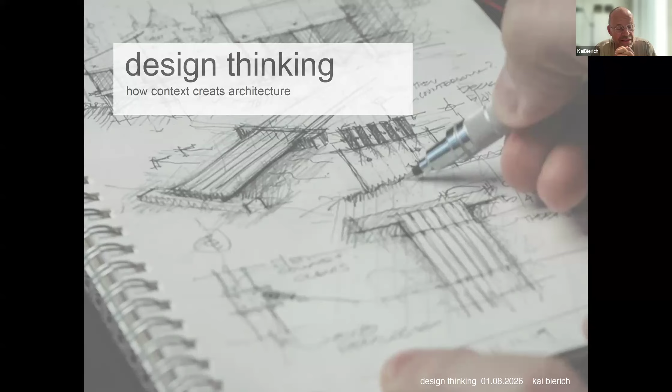A few sentences about design. Design is an art of giving ideas meaningful form. It connects culture, nature, and human experience to create places that inspire. The best design feels inevitable, as if it has always belonged there.

And therefore, I will show you the first picture. I think everybody knows this from Michael Graves. It is a teapot, and it is something which is very important for design.

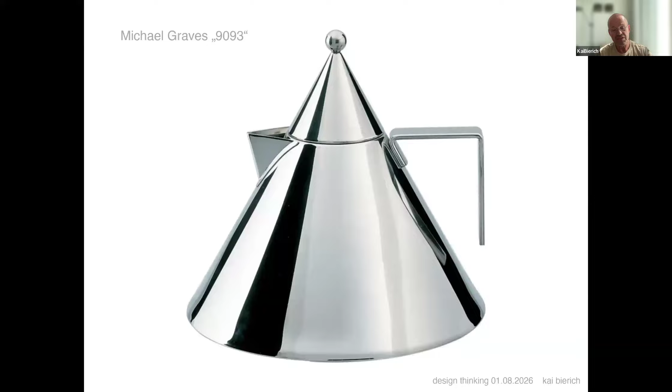Design combines, to me, four elements: always functionality, practicality, attractiveness, and also affordability. So to us architects and designers, it's very important to achieve this balance. It's not always easy, and it's important to have a very precise view on what is necessary for the specific design.

And so I will give you six projects in the next 30 minutes, to read with me together the different importances about landscape, about history, sometimes about culture, climate, movements - meaning the external movements from traffic, about also the internal movements like in a museum, about light, which is very important even here in Germany, where the light is not as strong as in Vietnam, and of course about the human being, the people.

And so I will start with the first project, the Fair Trade Center in Stuttgart, which was partly one of the biggest projects in Germany.

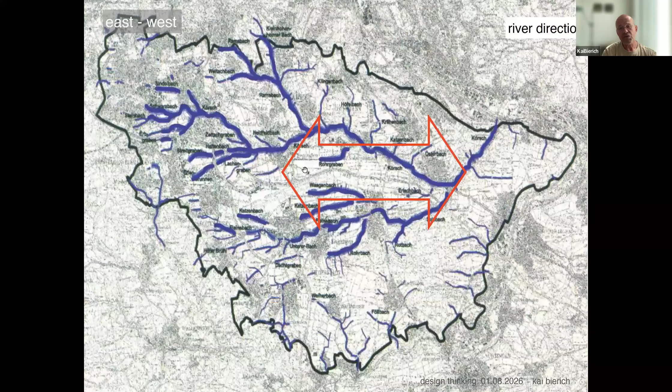This project is deeply rooted in the character of its landscape. Before, there were fields, like you see also around it, fields. And also the topology was very important, because on the one hand there were rivers slightly going from the east to the west. That was one thing right here. And that brought us to the orientation in this direction. So all the other participants of the competition - an international competition with 150 offices actually - were going along the motorway here. And we said, okay, it is more useful to have this orientation regarding the nature, the rivers, everything. But we had the problem that then here the motorway blocked actually the design.

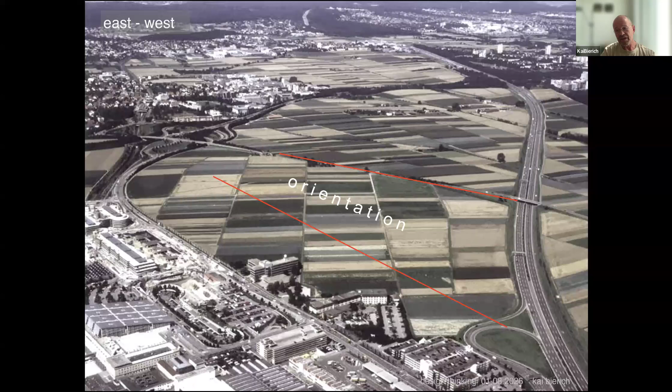So it was a question of ignoring the guidelines a little bit. The guidelines stopped here, and we said okay, now we want to go over it and orientate the whole design on this stairs. This is about 20 meters, which is quite unusual for a fair trade center. Usually fair trades, like other international ones such as Milan, are always flat and you don't go up and down. But here we are in Baden-Württemberg near Stuttgart, so it was very important to regard the topology.

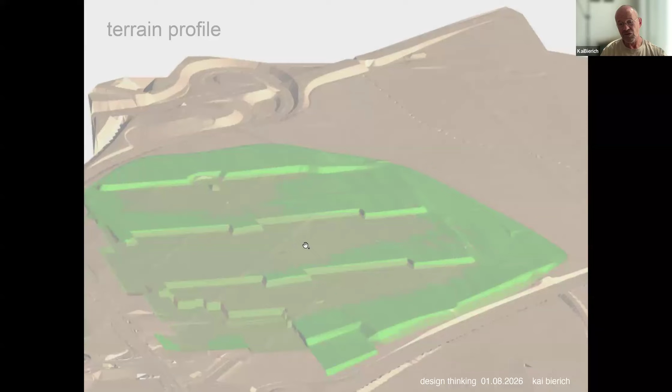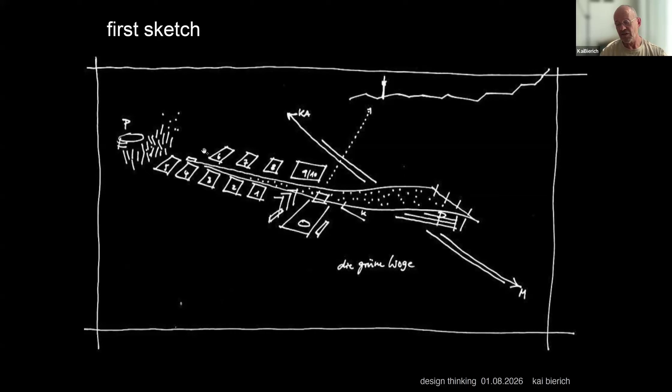That brought us to the first sketch, which I did here. It was going over the highway with this huge wave. We wanted to create something like a park, a green connection between east and west over the highway. The orientation of all the fair trade halls and the Congress Center, and the two entrances in the west and east, gave us the structure for this.

Now you see what we wanted to make, the parallel situation from here, east-west going to the airport. It has two connecting spaces here, two connecting possibilities. That actually brought the jury, in the very end, to the opinion that we got the first prize, right? And it was not so easy.

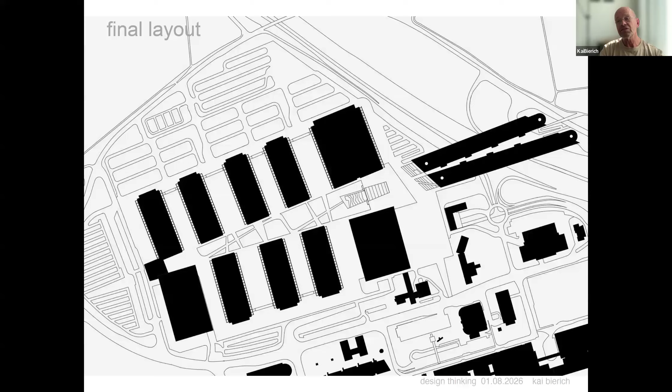It was 150 entries. The second round was 30. And the third round were 3 offices. In the very end, we were super lucky that we got this, because it was, of course, for the office totally a movement in another direction.

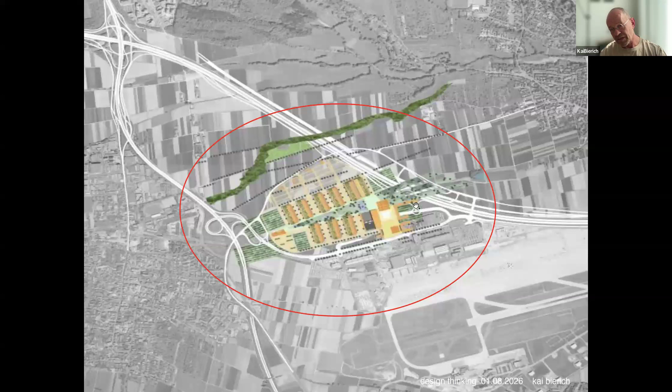So here you see still 3 fingers going to the highway. That is what I told before - it's also a question of affordability. That was too expensive with 3 fingers, so we put together all the parking lots here in 2 fingers, and reduced the angle a little bit, what you see here in the very end.

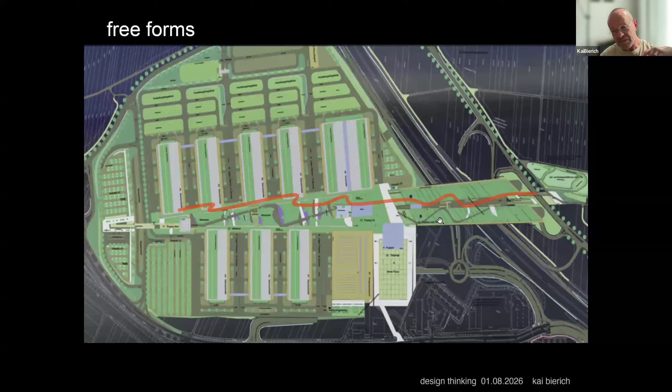Then, because that was actually a landscape design, also very important - the population of this area was upset about the whole building, and we said okay, we are doing a lot in the design to give back some natural elements. So we said, okay, this is a rational structure with the halls, everything, but we disturb it, like yin and yang, or like wabi-sabi. We disturb this with organic lines.

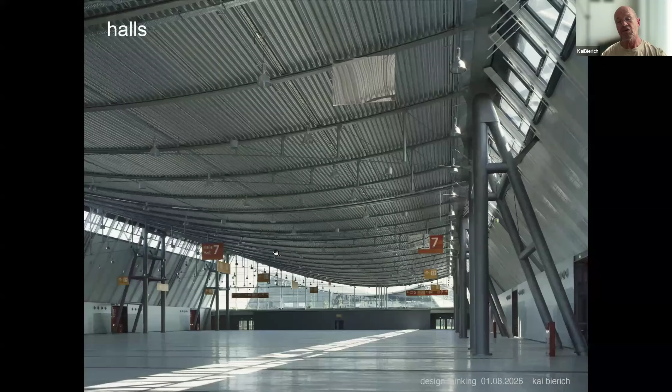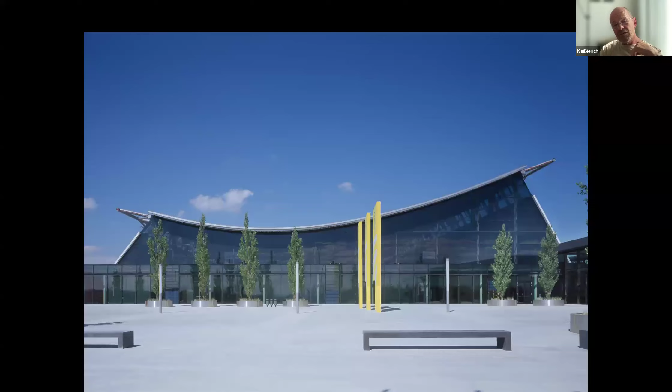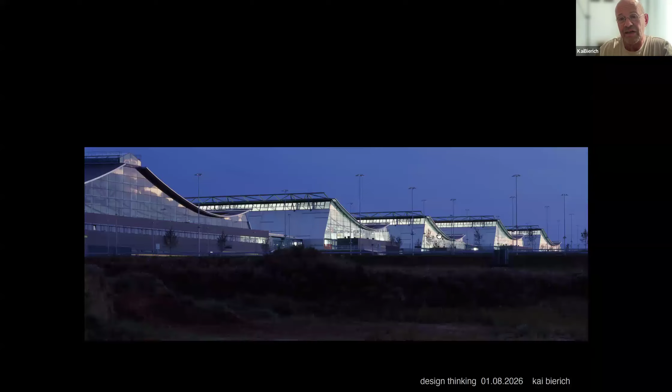This organic line was also documented in the shape of the roofs. You know bridges, or something like a rope, which has a very natural shape. We transferred this into the design of the roofs of the fair trade halls. Here it was in steel, which gave a very nice and iconic view to the outside, and it's also unique to make this totally transparent, which was new for fair trade centers, because we said people should also have normal daylight in the halls. Here you see, to me, actually a poetic or lyrical side of the fair trade center, which is not usual - usually you have more black boxes.

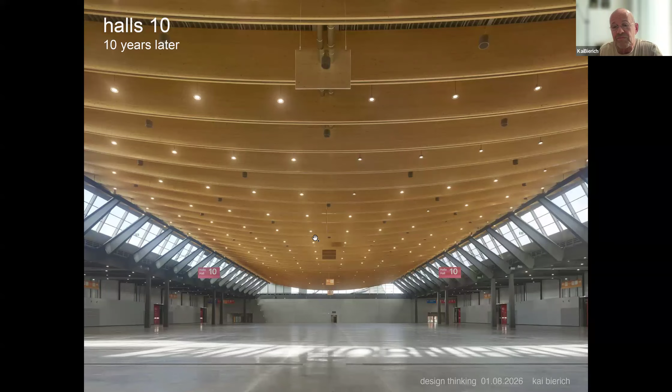A few years later we had the assignment to do hall number 10, because this fair trade center had exploded and was in high demand. We said, okay, what do we do? We did not want to just continue with this existing steel structure in the design. We said we must follow the form somehow, but we wanted a sustainable development in the materiality, so we used wood, which is now very requested in the calendar of the fair trade.

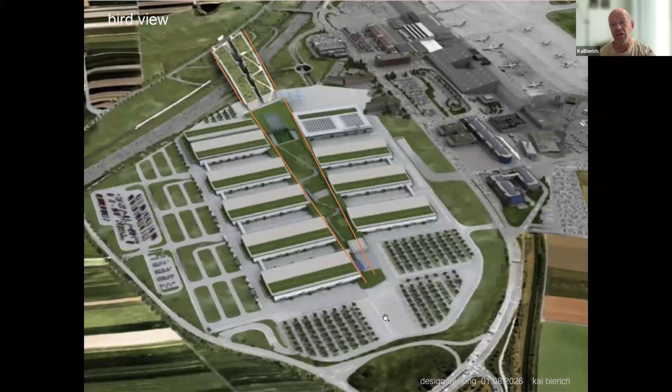So the other element was this park. Here it's very busy, the halls are super busy during the fair trade. So we wanted to have people going out here to discuss, to smoke, to have drinks, whatever - like a relaxing zone, which we followed here in the parking lot over this motorway. And you see here what could happen here.

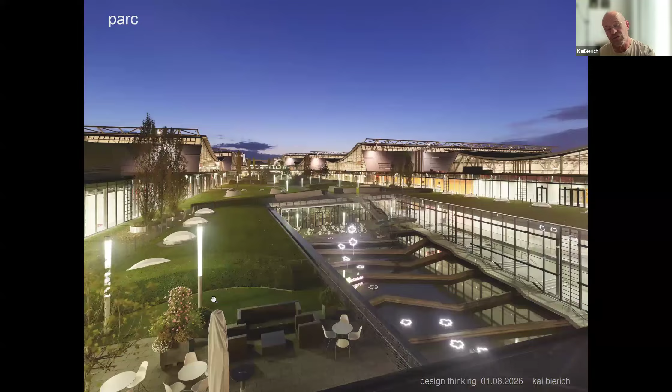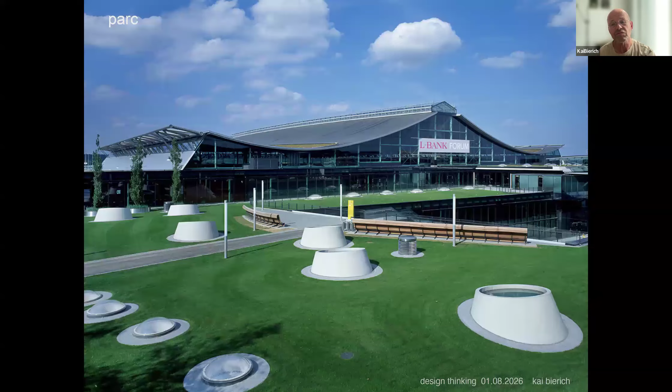We had daylight systems, which I'll show you later, and some sculptural elements for the daylight too. You see here different fair trade setups, and here is somehow calm - here's water and good, pause-like quality. Now here you see this in detail, and also the organic forms I mentioned - here we also followed this principle in the park.

Now I'll come a little bit to the materiality.

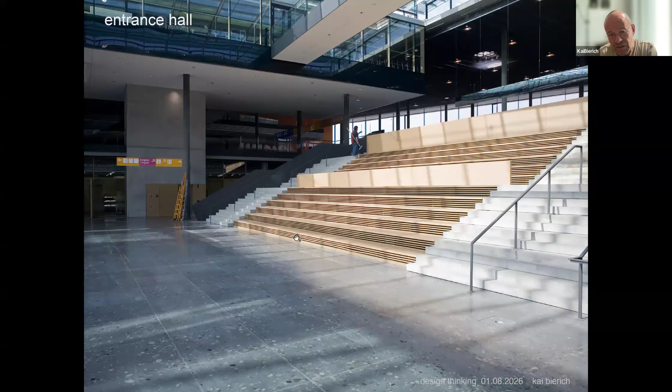That was some other thought to give only a background, like in a theater, with very rough, authentic materials like concrete, wood, glass, white slabs, and so on. To have something like a background for this really colored things going on in the fair trade usually. The only thing we allowed the designer here, done by the office Uebele together with us, was this orientation system. So whenever you see color in this fair trade, it is orientation, not architecture. Architecture is always in the background, like wood, like slabs, like authentic natural materials. There's no lipstick, no decoration. This is only rough, a background for this huge event and the color things coming up in a fair trade.

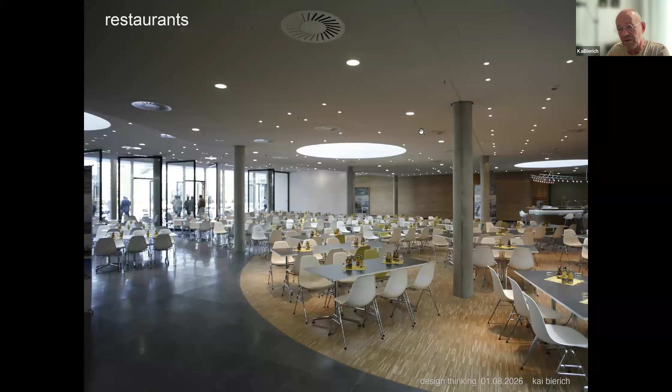The other thing is the transparency and the skylight, both very important to have natural light in the fair trade, and color. If you do skylights from above, they are 5 times stronger than lateral light. So if you have a window of the same size to the side versus above, the skylight is 5 times stronger. So we said, why don't we do some perforation to the sky, going deep inside, to give this natural atmosphere. It's totally different with natural light compared to only electrical or LED lights.

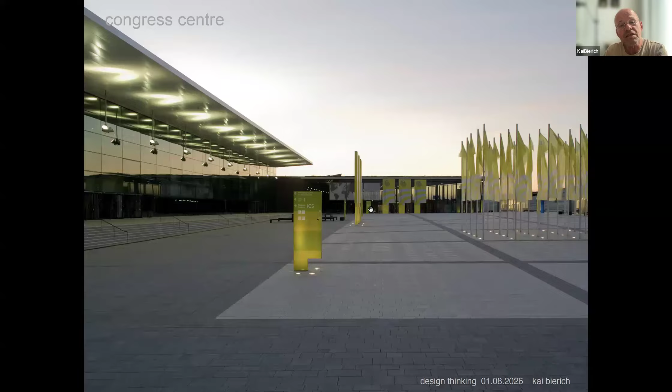The other thing was the Congress Center. We also wanted to have the roof in a curved, organic way, but not readable as a different form from the Fair Trade Center. This roof comes up 12 meters here, and statically it's really sportive. We did this because we wanted the central plaza to come into the building, so this transition is accompanied by the roof.

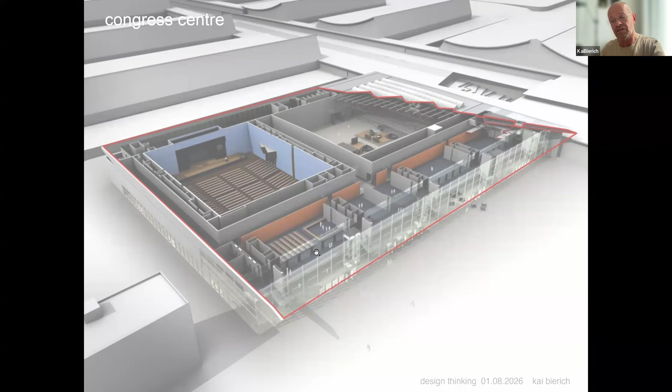What is the content here? We have 2 big halls for 3,000 and 2,000 people. We placed the seminar rooms back behind the facade, about 6 meters, but we also put a skylight over it to always have a lightened atmosphere for the working spaces.

The last thing is the parking lot here for 4,200 cars, following the park onto the roofs. People go through the middle and directly to the main entrance of the Fair Trade Center. It's quite easy, but it did not follow the guidelines, it actually ignored them. I told you the plot was already finished, but they said this is such a tremendous idea that we got special treatment from the government to build this overwhelming structure over the motorway.

They needed money, so they rented it out to Bosch company, which gave about 15 million euros for 10 years. Because it was quite expensive, more than usual, it became the biggest advertising sign after the Hollywood letters in the USA, which are 15 meters tall, ours is 12 meters. It's just a fun story, but you also see at nighttime it becomes something like an iconic symbol for Stuttgart. If you come from Munich to Stuttgart, you always see this parking lot at the very beginning, and that makes this building famous.

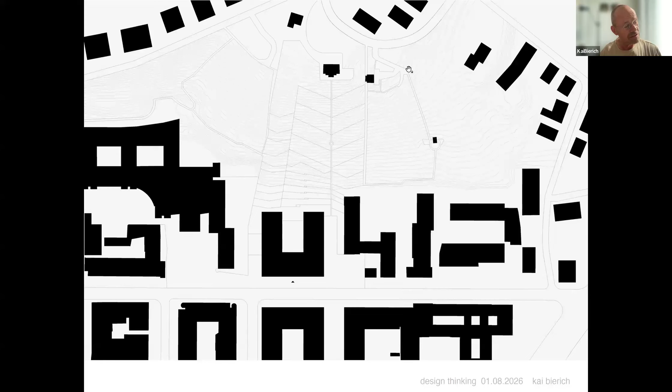And yeah, here you see actually this is a road. This is a city here, and they go up and climb like the first step to the vineyard, go to the vineyard and use this vineyard, other employees here, right?

And this is a U shape. So here we needed actually a huge covered space, so we did these top lights, the skylights, which belong to the grammar of Wulf Architects, so that we have natural light in the interior somehow.

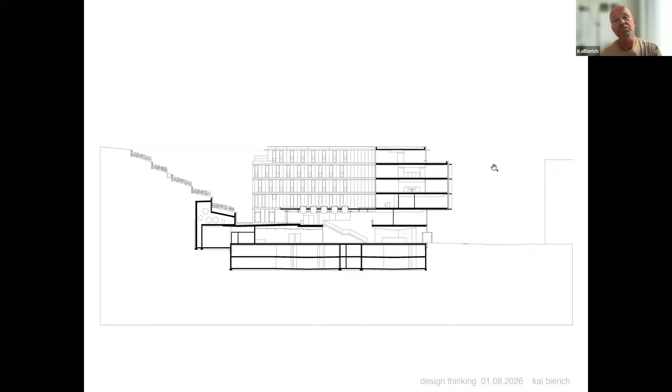Yeah, this is the vineyard you see. There's still existing grapes here, and even a little house which belongs to this project.

And now you see what I told you, this U shape and direction here, very open, a very different facade which we have seen on the beginning, right? This was the facade in the beginning you see here. It's totally different from the facade which we have here, because this is like an egg - one side hard and inside it is soft.

And you go out here and then climb the vineyards. And the inside here, you see the skylight again, and also the authentic materials - only what you see is wood, not lipstick, nothing colored.

And this one is totally open, you can move beside, and then you have this huge space, and you can integrate the entrance hall into a huge public space.

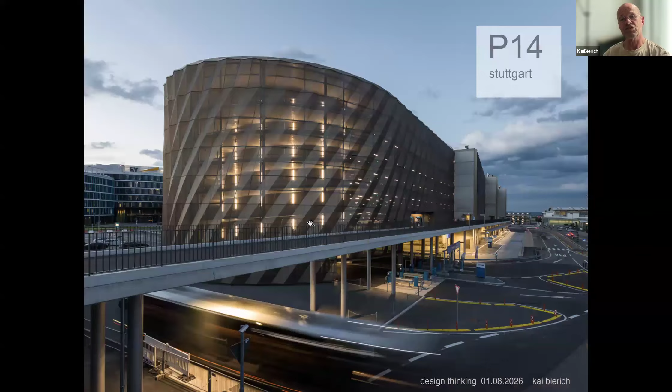Then there was another thing near the Trade Fair Center, which was a parking lot. Not such a super task for an architect, but we said it was more than just a place to park cars. The ambition was to create an iconic gateway building that strengthens the identity of Stuttgart Airport while fulfilling several urban functions with a single architectural volume.

In the basement there were buses for going around the region, and upstairs there were 6 stories for cars. We told the airport, why don't you do this pedestrian bridge here and connect to the airport? That gave a huge impact on the renting of this building, because it's favored by people - they just get out of the car and go directly to the airport.

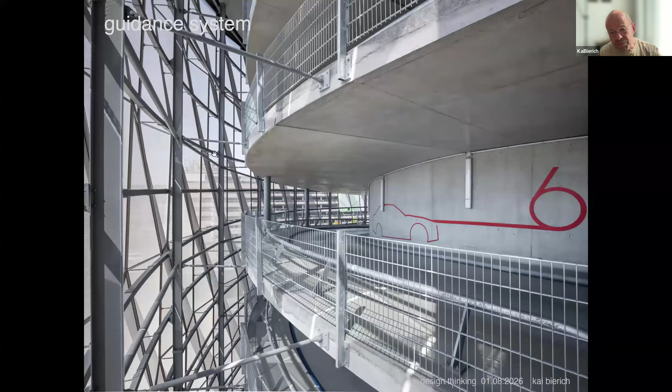This is the one at the airport, with a folded metal facade which, if you look at it in this crooked way, is nearly closed. But if you go from inside to outside, totally different - it's more like a transparent skin a little bit, and you see the things around, but through the skin.

So this is outside, this is inside. This is to have the natural light, of course. We didn't want to close the facade, because then you would have needed LED and lighting things and so on. We placed this facade on this one.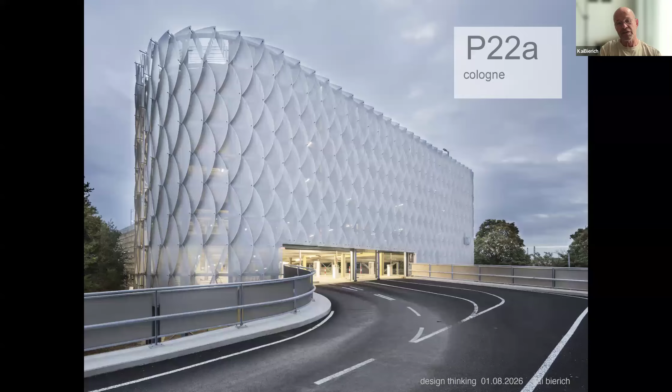It's very similar to a building we did in Cologne - it's like a fish, a little bit like the skin of a fish, the same principle as before, not folded but added one by one. We did the same thing, getting the light in, and from inside to outside you could read through. It was a very iconic building also at the Cologne airport, near the Cologne airport. Same principle, but totally different in detail.

But that is something to use in design - if you find a principle, there's no need to do it the same way every time. Think, why could I not use, from my whole history, from all my life experience, in a different way - no problem.

Now we go to China, internationally. There was Chongqing - nobody knows it, but everybody should, because it's the biggest city in the world, about 35 million people. It's really big. A lot of international architects worked there, like Moshe Safdie - some of you might know this building which has connections here. It's really like utopia, something like the 22nd century, and the city is still growing like a megapolis.

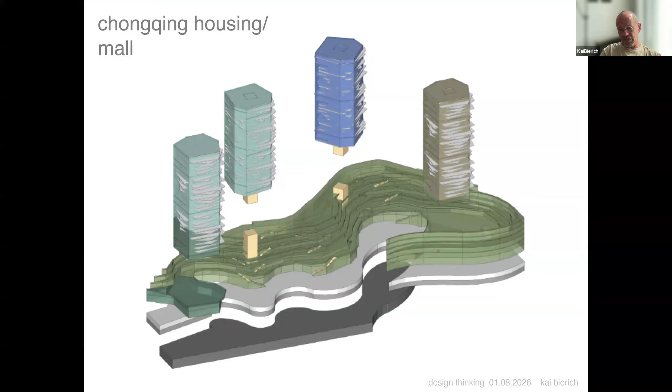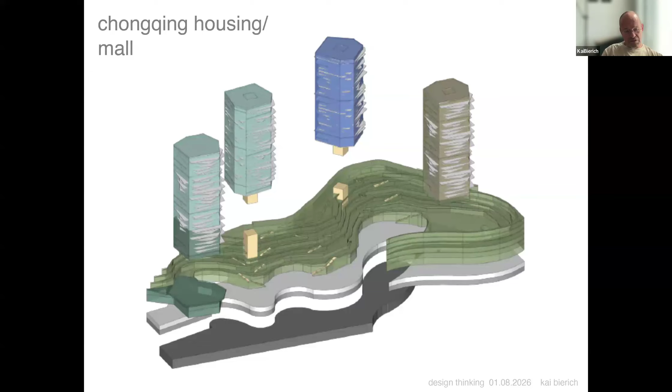We had the chance to have a few projects there, and I'll show you one typical for this town's topography - it's very hilly. You don't see it so well, but in the background there's a bit of mountains on the left side. This hillside is now occupied by the whole city. We were asked to build a shopping mall and housing there, and made a proposal to deal with the topography in the basement, or in the first 5 stories a little, and then upstairs with offices, dwellings and apartments, at a little distance.

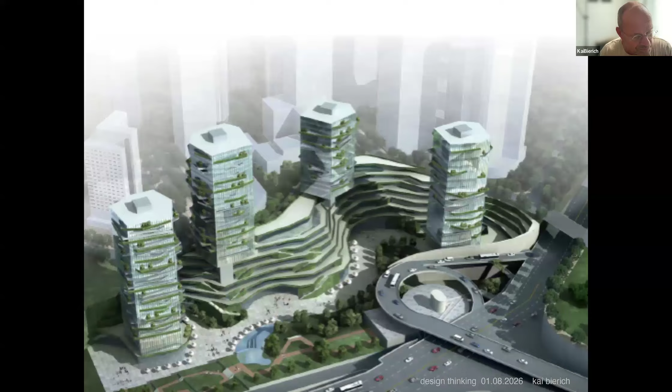Here you see it in this section. Then the second aspect was a dialogue between architecture and landscape a little bit, but they also wanted, of course, this microclimate with 35 million people and a huge density of building - you might know this from Ho Chi Minh City or from Hanoi.

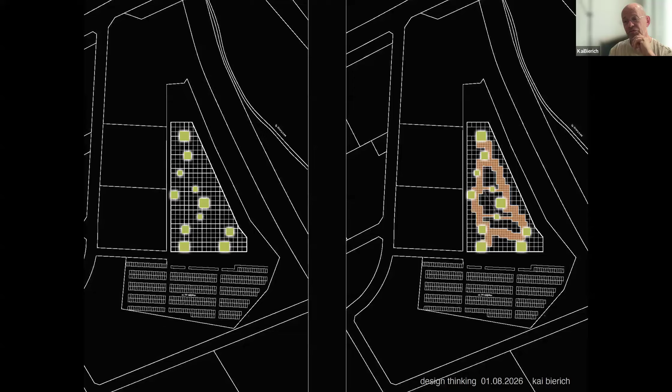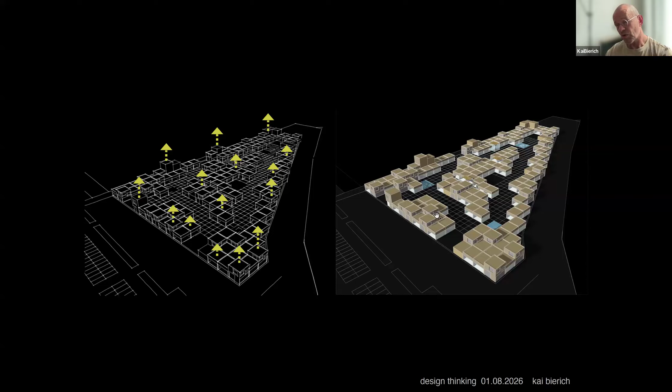Then the question was how to realize this in architecture. We said this culture in the desert comes from the house form of a tent. Here you see the boxes and how they work, including two-story boxes. We decided to put a tent over it - something giving shadow and protection against rain, a tissue that covers everything and gives a common identity. So it's a town in itself, but everybody has their own identity through products and design.

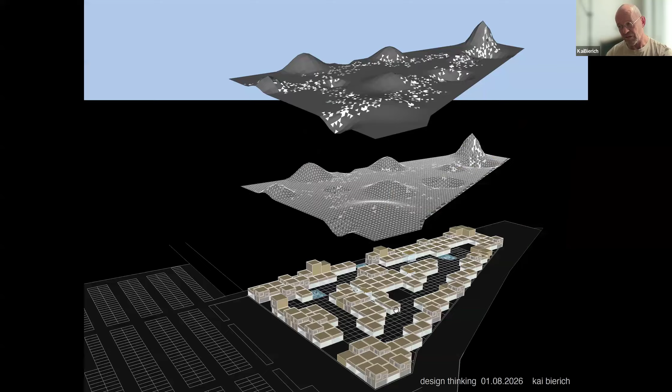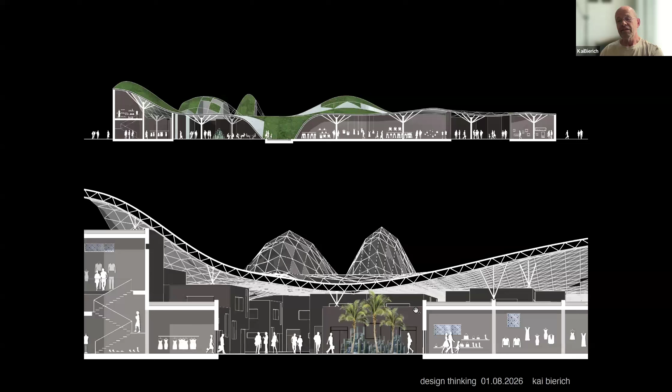This is the result. You see the forms here, and people are meant to go up a bit. You also see the top lights we always use. It's like an outdoor room, not indoor - the same as the bazaar, which also has light through domes upstairs and courtyards. So it's like walking in a normal daily situation, like on a road, with shops like Puma and others - these were just samples for us.

And the last I'll show you is Shijiazhuang Airport, which is actually one of the biggest airports beside the Beijing airport in China. If there's a huge accident or terrorism or something happening at Beijing airport, they asked Shijiazhuang to overtake the responsibility as a supplementary airport, something like a strategic relief airport for the Beijing metropolitan region, because it's of national importance to always have a running airport system in China, of course.

And so they made an international competition. Unfortunately, Norman Foster won this. We had the second prize, and we didn't have a chance to realize it. Norman Foster in the end won and realized it. But it was interesting to show you how we carefully studied the surrounding - there were always about 15 offices, and we did the second prize. It was not so bad also.

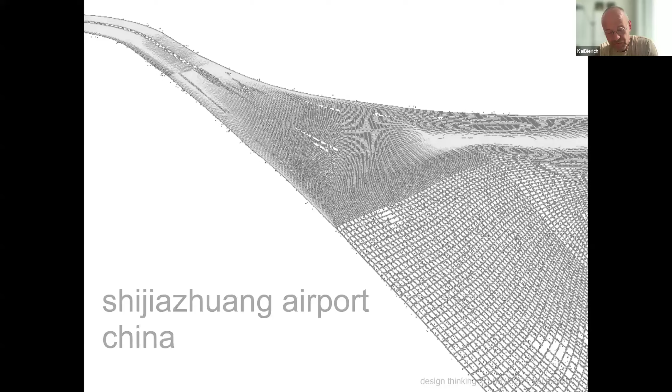So we studied the landscape, the urban development there, and the cultural context very precisely before we did the first things. I show the result before, but only to give you an influence. Here was the existing airport, and the existing urban surrounding.

And this is our new design on this one, and you see here also the extension possibility. So you make this one again here, and so on. And then you have something like a railway inside. But it's more interesting how you go there.

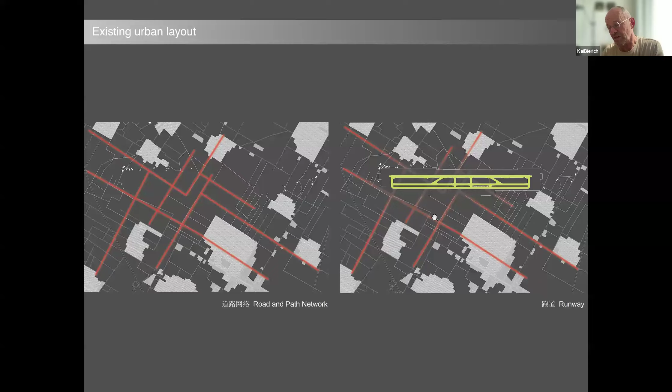So what the Chinese guys did, because they're always building like this, they just put this in totally against the urban development, the farmers and landscape structure east-west - really hard and rough. And we said, okay, maybe our task as a designer is a little bit to come back to the old form, to the old orientation, to the old directions. And so we said it is something in between.

We said, okay, we respect, of course, this runway, this system here for the circulation of all the flights, but we need something which also is oriented on these old structures. So that was the first sketch here, the first idea.

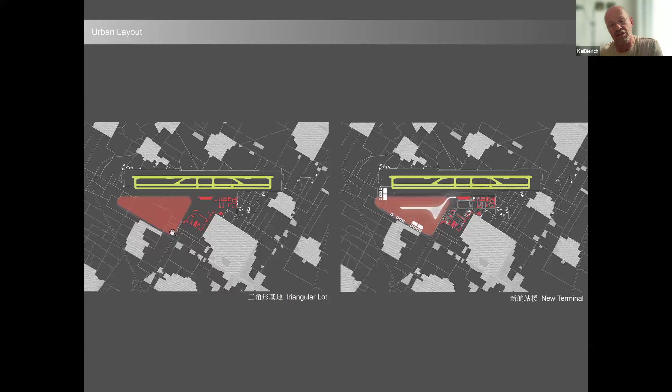Then you see it is somehow combining both directions. So we were healing in a way something which was destroyed, and I think everybody could read it - there's something which we respected, the old thing, and now orientation, of course, we needed to overtake the new runway there. And that was the idea for the form.

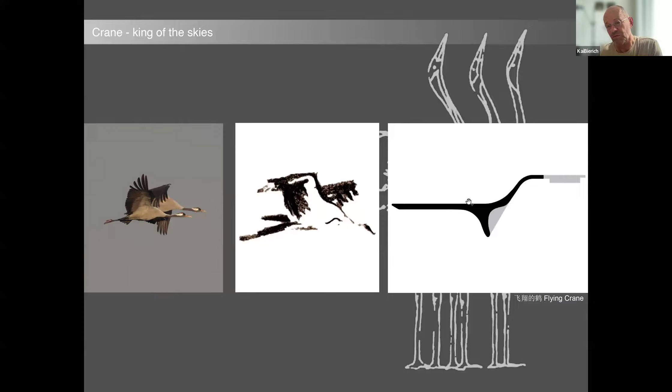The crane is the king of the sky, actually. And if you reduce the picture of the crane, which is the huge bird, you come a little bit to this form. So, the crane is a symbol for flying.

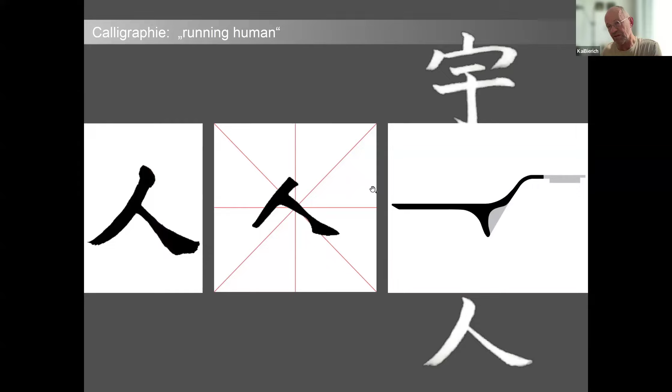Next was the calligraphy, the Chinese lettering. This one is a human being which is running - this is the head, this is the legs, the arms you don't have. So this was also a sign, and if you reduce it, you also come to this new sign. This means we wanted to integrate, to respect somehow the human being in this whole form - a reference to what's going on in the airport, which is made for human beings.

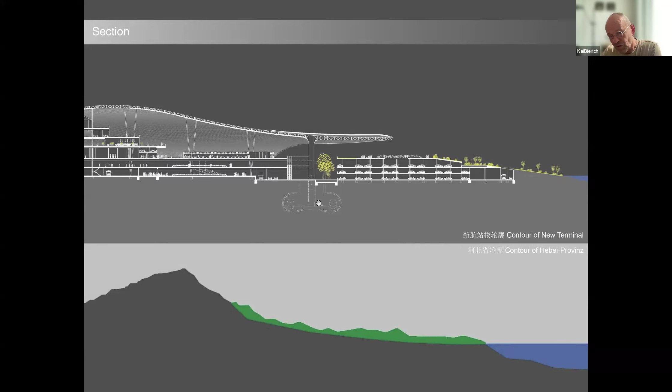Then the third thought was they needed space for 10,000 or more cars, and we didn't want to put them, like in Stuttgart or Frankfurt, around the airport as car parks - we wanted to hide it. The typical movement in this province from the sea is given a little bit by this topology, and we were hiding the whole structure in this topology. So we reduced the total height of the airport because we wanted to integrate it somehow into this nice landscape also. So it has a double function: integrate the car parks and reduce the dominance from the height.

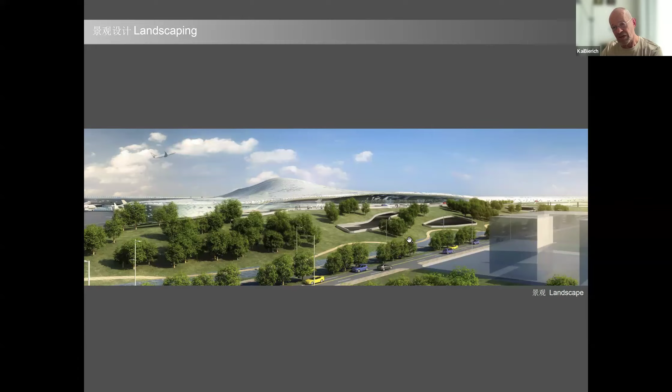Yeah, this one is a result. Also there we cut it with skylights to have a natural light system. And you see it is somehow embedded now in this new landscape, which we actually overtook from the existing landscape a little bit.

And then number 4 was the implementation of the flower system, which is actually in Hebei province in China, and we reduced the flowers to this totally pattern, and in the very end, a geometrical pattern, and put it on the facade.

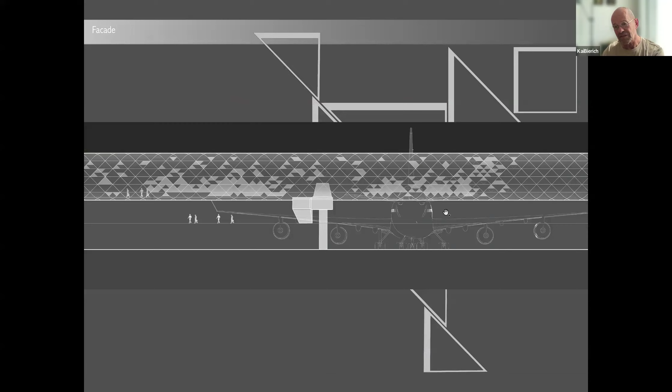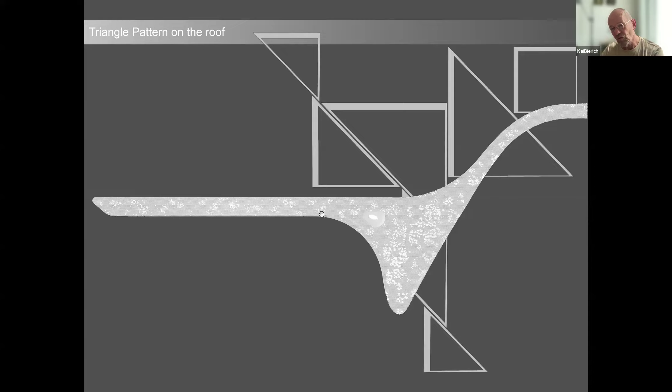So to have the same thing, some daylight system, and some ornamental system, also coming up from the surrounding, from the context. People who go there can find somehow, okay, this is coming from my culture, from my context. And here you see that we put it over the roof and over the facade, the whole building, and gave natural light.

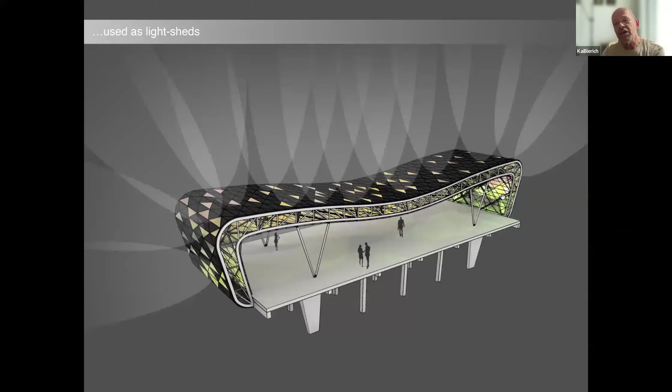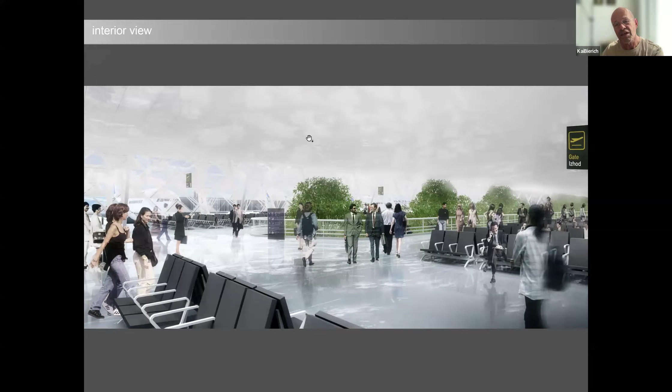Number 5 was, they have in this culture, in this Hebei province culture, they color glass from inside, and so we said, why don't we bring a reference to this idea inside of a vessel or a design piece, the inside view. And we did - we have two colors. One was outside, we were talking about this flower system, and inside we said there could be some nice colors from this principle which we have seen in the vessels. And this is now the result of both. Inside, from above you see the lights, and inside there are some drawings and so on.

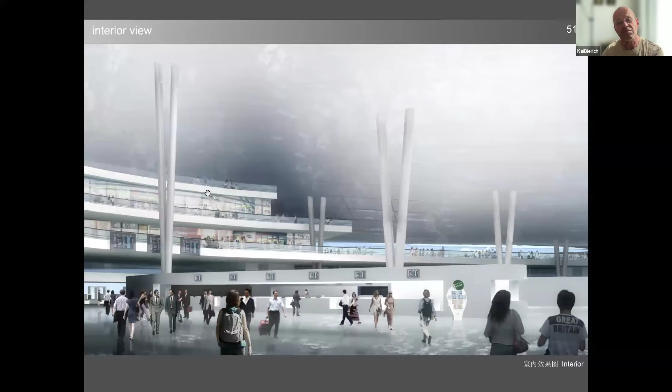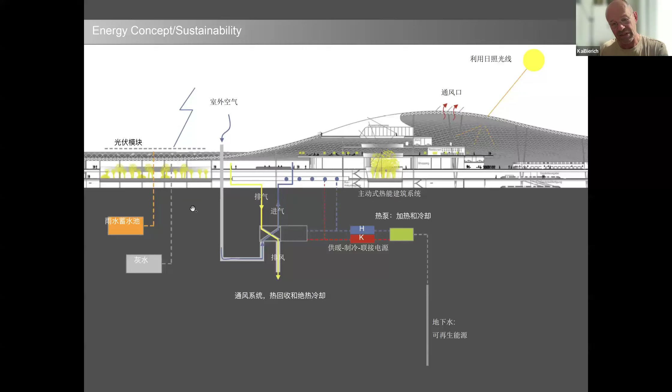And the last is this - we were asked to have modern technology, and we did all the stuff from our designs, so we went to the Earth thing, and we did sunlight here and implemented photovoltaic elements in the glass, done by an engineer like Transsolar. And he said, okay, where is the maximum temperature and where we have to put more panels on it and so on. That was a good way also to show sustainable design and not only facade design. Facade design today must always be together with some ideas.

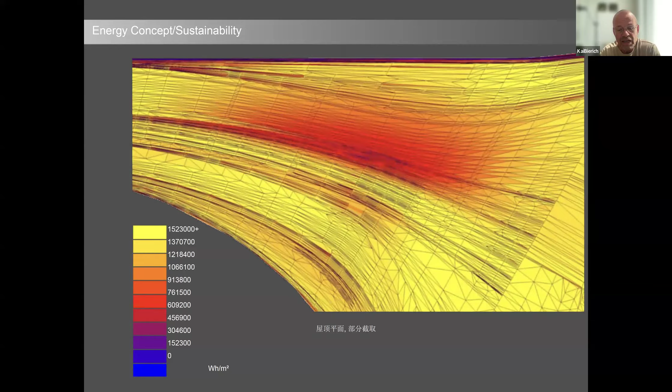In the past, architecture often focused primarily on function and appearance. Today, our design process is much more conceptual and holistic, integrating sustainability, cultural identity, and long-term impact on buildings, people and environment. Every project begins in our office with understanding the place, the people, the unique story behind the task, the context, because meaningful design is about creating lasting value rather than simply constructing buildings or showing facade. Thank you.

Thank you, Kai. Wow, it's such a huge amount of information. I mean, through all the references and the projects that you showed in your presentation, we can see that the design has too many languages and there are too many meaningful thoughts around in a project.

But let me buy the people some time to ask you a question. May I just talk a little bit about your feeling when you know that we have the workshop with the subject, the topic is Eureka. So what do you think about that, and what is really for you a Eureka in design, especially in architecture, in urban planning?

I mean, I'm always telling the story about Albert Einstein. If you hear the Eureka - you all know he was searching for his super formula, which in the very end gave also the impact for the nuclear development in the world. And he was working, then he said, 'Okay, I have to go on vacation now, it is too much for me.' And then he went to a beach in northern Germany and was running there. He was already 70 or something, I think. He was running with a stick, a wooden stick. And then when he was standing there, suddenly he was engraving in the sand E=MC squared, which was the formula that brought the whole world actually in the very end.

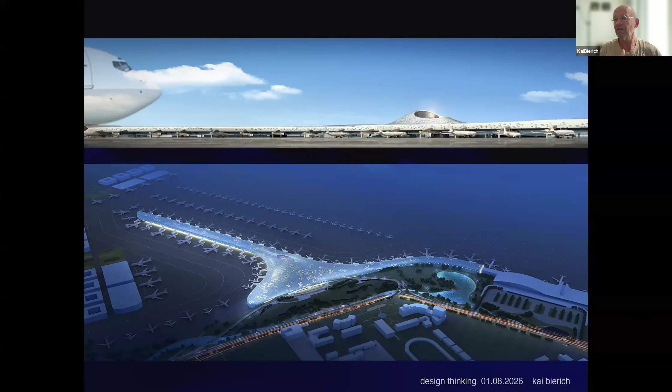Therefore I think it's important to see the visible, and to identify the invisible layers very precisely, and to always listen in the background for anything I can follow in a poetic way as an architect, not only rationally. Because there are several rational principles always possible—this is not the only one. The Fair Trade Center could be totally different. So you have to say, okay, this is my part—I want this organic, transparent, light structure for this design. Why? Because there's a lot of resistance from people, and maybe they don't want the machine, they want something lyrical, poetical. But next time, for the IHK building, they said it must be urban, and we couldn't use the same approach as the Fair Trade Center—it had to be urban, with two facades, one facing the Vineyard, the other the Stuttgart city.

Maybe it's like your glasses—something is on this side and something else is on the other. If you recognize those things, those second, invisible layers, I want to encourage you to hear what that could be. This is not only ever a rational process—even something that looks totally rational is not, in the very end.

You are the one who says, okay, I want to do the whole, and the whole is not symmetrical, it's somehow different. So at what point of design do you go for your personal thing and encourage yourself to go for it, and not to follow only the rational?

This one is for the client, because the client has no ideas, but in front of the client you are always required to have some rational principles. So I did this, but in the background you are going with your design ideas, and that is very important to have both.

One face to the client shows rational principles, but in the background you are translating this into your personal things. I wanted to encourage finding these invisible layers, this second system which is only you, to go for it. Then people will see in the end, and they love you because you did your personal design, not something you see all over in the magazines.

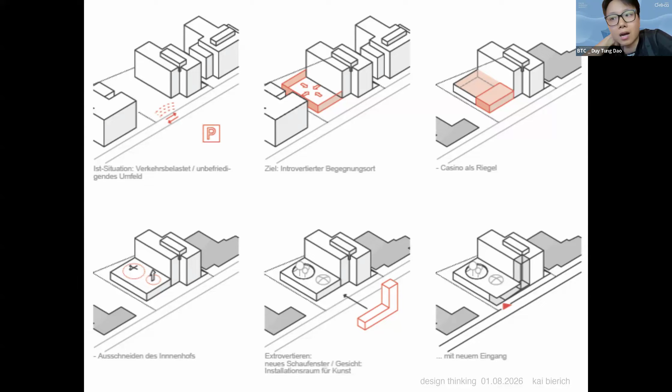My question - I would love to connect your approach to the theme of this workshop. We wrote about Archimedes and the Eureka moment. In our workshop we teach that the true Eureka is not a sudden stroke of genius, but organizing the results, exploring the invisible 90% of the iceberg - the cultural, ecological, and historical context. Your philosophy of identity through search implies embracing this kind of ambiguity. Across your projects, whether built, unbuilt, or still on paper, how do you manage the psychological uncertainty of this deep dive phase? Furthermore, in an industry controlled by strict deadlines and commercial pressure, how do you know when you have truly struck the core of the problem, and how do you know when you've found your Eureka moment?

Yeah. You mean the time where you go to the right or to the left side? I mean, for competitions we usually have 8 weeks, sometimes 10 weeks.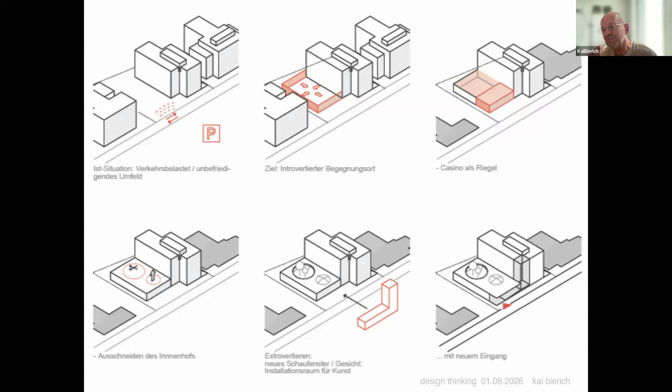For example, GFT - GFT was a very hard businessman, but we wanted that assignment because we smelled the chance to realize a really nice building beside it after we won the competition. Then there's something called a controller in companies like his, and he's used to thinking a certain way. The controller was always asking, why do you do this?

And what is the function for us? So it was really hard. I needed sometimes to kid him a little bit about it, to hide it. But it was to us as an office very, very anstrengend, very, how to say, too long, much too long, the whole process. But you said, okay, there's another project.

But usually, as far as I understood from the finance background, you have to say, okay, this is 4 weeks, this is 2 weeks, and you have to press your eureka moment a little bit. You can have 1 year for the eureka moment, that would be nice, and you research everything, but you're always also forced as an architect to think in an economical way about your work and your design, not only about poetic thoughts.

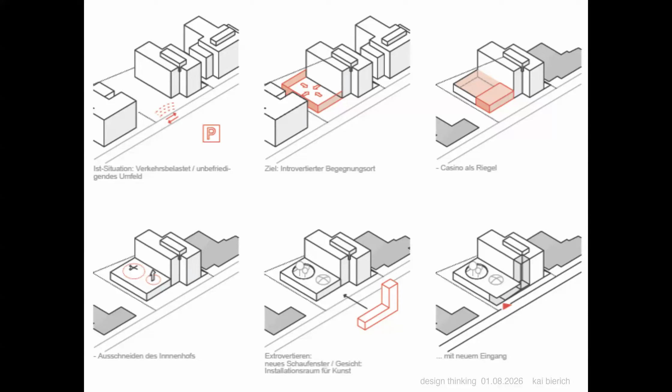Yes, hard question. No, I think it is not an iconic self-expression architecture. It is not. Therefore, we did research in Malaysia, in India, in China, in Vietnam, in Russia. I did not show you things in Russia, but it is actually the overall view which you get in the end. No matter which language, which culture, you have to ask yourself what is meaningful for your design concept. Are there social, economical, or ecological aspects? So this is something you need to do in every new environment, and this new environment educates you a lot.

Once we did a design in Alaska, it was only minus 30 degrees, and they asked us. They already had the design for this container, which was for observing things, scientists and students and working groups, and they already had the technical things, but they said we need to do something for the design. We were thinking about this rough, cold environment, and that gave us a new aspect. So I think each task you have to contribute to the culture, to the context and everything.

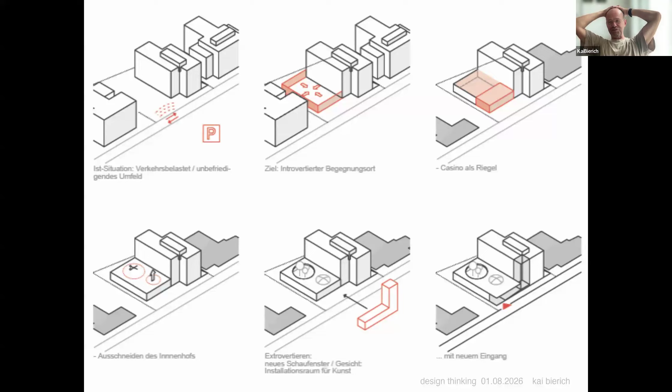And he said, with 5% thinking at the first moment, I get 90% sometimes of a whole project, because the design, the thought, the Eureka moment, is so good that we economize a lot of things behind it. So it doesn't depend on how long you need. Some guys have the Eureka moment on the first day—okay, good luck—but usually it's not like that.

But if you have the eureka moment, that identifies you as an architect. Nobody else is able to, because they are not thinking in this crooked and integral way. People usually say, I'm in this tunnel, this corridor, working for the state or the town or the institution, and this is some weird architect, I don't want to know what they think. But you earn a lot with this, and therefore I encourage everybody to keep searching for eureka moments in life, because that satisfies you in the end, not fulfilling things.

This one in Germany, last sentence, is always together with engineers. Climate, of course, landscape, of course, and static engineers from the first moment, otherwise you don't get results anymore. And in China, it's not like that, they just ask you and you fake something, do a lot of renderings, blah blah blah, and then they say, oh it's nice. But it's not sustainable, it's not the whole thing. So there's a big difference in the working process.

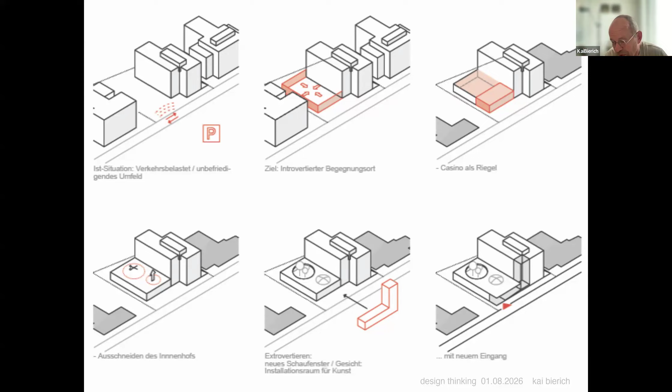The Shijiazhuang Airport was the biggest competition we ever did after the Fair Trade Center, because it was tremendous work and a lot of theoretical research before. We had advisory guys from Netherlands who were already building airports, so for us it was our third airport competition. We already had a lot of experience with this, where the land side is, where the air side is, and all those things. But without advice from those Netherlands guys, who were, by the way, also advising Norman Foster, so it was a little embarrassing in the end because he got the first prize.

But you cannot just go for form, for the physical space, without the function, because in an airport the function, the luggage way, the passenger way, the crew way, that is so important in the foreground. I didn't show you because we were talking about design thinking today, but I think we worked three months on this competition, always flying to China to present. They also have something like intermediate improvement sessions, so they said, okay please go this way, this way, which was very helpful. But to give the last answer, the physical form, the history and the narrative is a nice word that came from us, but the other things came from the airport designers from Netherlands, of course.

No? Yeah, you never walk alone. Yeah, I think this is a principle for our field, because no architect works alone in the field.

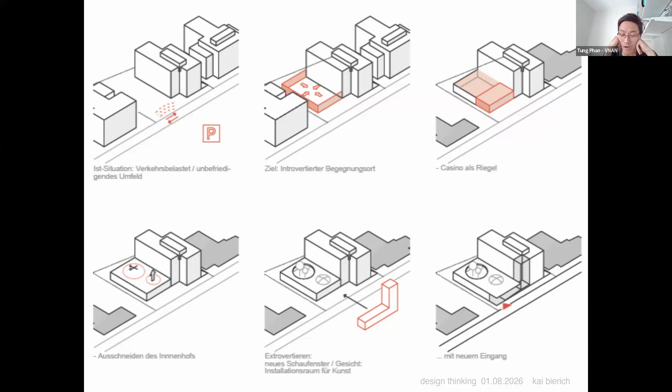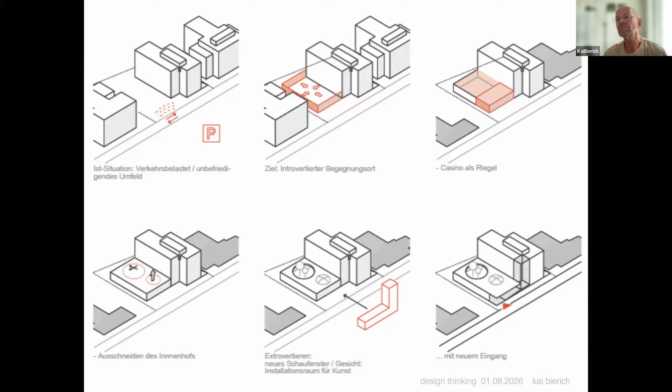Hi Kai, and hi everyone. Kai, thank you so much for your presentation, such a wealth of knowledge, information and inspiration I would be able to take with me after this. I'll try to formulate my question really fast because we're running out of time. I have to say you got me right away at the first slide when you broke down all these elements related to context, landscape, history, climate, culture, movement, light, people, because I identify with those.

Those things I think about a lot when I approach a project from the start. We call it the research phase when we start the project. But a research phase in itself can give us too much information, too much inspiration from those weeks or months we spend doing research, and sometimes each element - landscape, history, climate - can produce different designs for the building. So for me, speaking from my own experience, that moment when we leave the research phase and actually start drawing the first line is really important.

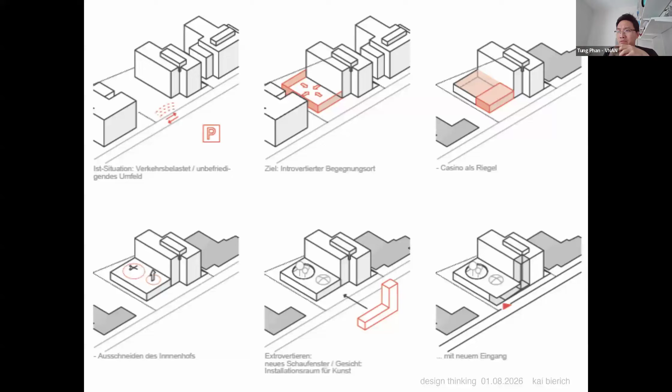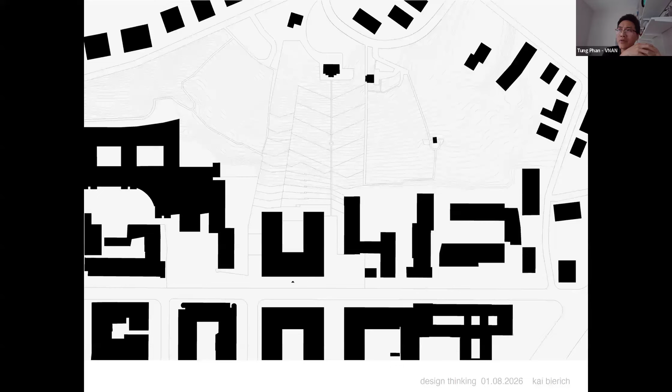And somehow that moment also involves sacrifice or compromise, or like killing your darling or darlings even. So I just want to ask you, is that something you share with, or is that a challenge you have faced during your whole career?

I think the challenge is to transform all this knowledge you mentioned into insight, and insight into space. Because it's no use - we are not scientists. We are emotional, intuitional persons in the very end, sensitive persons.

Like Einstein was, because he was so blocked he needed to go out, to be alone, to be on the beach, to listen only to the waves. I don't know whether this story really happened, but I like it so much. Then in a relaxing moment, he found his Eureka - not while researching with a team, all the talking in a big round, but in a quiet moment, concentrated, giving intuition a chance, and then it comes up.